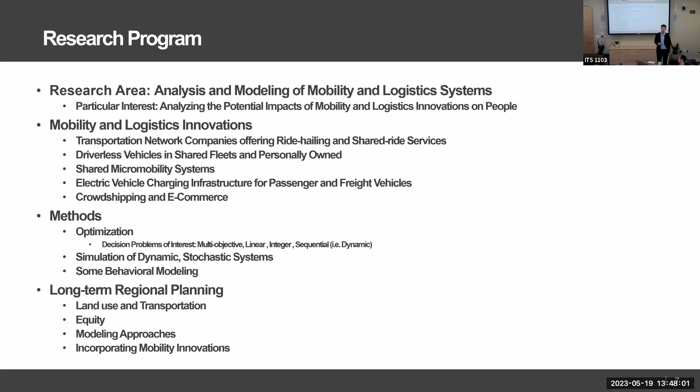I've also become quite interested in long-term regional planning, the models associated with long-term regional planning, the equity implications of long-term regional planning decisions, and really how we can incorporate mobility innovations into those plans and represent those mobility innovations in models that support the planning decisions.

All right, so let's get into the focus of today's talk, which is about operating on-demand microtransit systems with virtual stops. So some acronyms first. I'll be using MOD, or mobility on demand. I'll tend to just say the whole word, but just in case you see it on the slide, here's the acronyms. C to C being corner to corner, as opposed to D to D being door to door, whether or not the vehicle is coming exactly to your trip origin, or you might have to walk a little bit. RV being request vehicle matching, PUDO being pickup and or drop off. These are useful acronyms when describing an Uber and Lyft type service. Ride pooling being RP and RH being ride hailing, and then you might have heard of VMT or VKT. I'll be mostly using vehicle kilometers traveled here today.

All right, so a little bit more about what we'll be talking about. What I mean by mobility on demand is effectively where you, the user, go on your phone application, make a request, and want the vehicle to come immediately. This is opposed to a schedule-based service where you can still go on your app or your web browser and schedule a ride sometime in the future. So I'll mainly be talking about on-demand or immediate requests. Shared ride, that is, you might be inside of a vehicle with strangers who you didn't know before you got into the vehicle.

Virtual stops, this is the idea I kind of mentioned with the corner to corner versus door to door. So rather than just using physical infrastructure-based stops like a bus stop, and then the other end of the possible spectrum being the vehicles come pick you up wherever you want, somewhere in the middle is this idea of virtual stops, right? So bus stops might be a good example if the local regulations allow you to use bus stops, but you might also use other places of interest or places that are convenient for vehicles to pull over to pick up passengers. So yeah, I'll be using C to C or corner to corner also to refer to virtual stops.

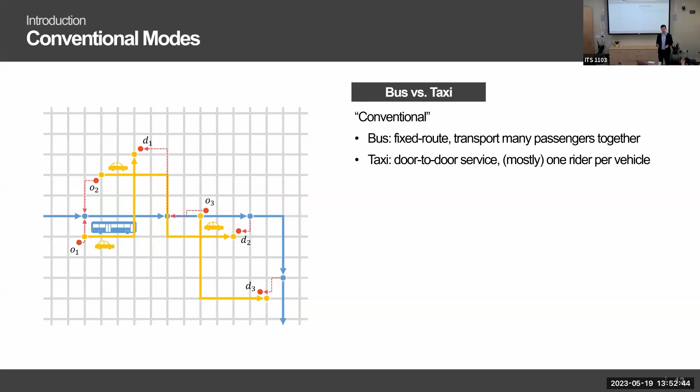Okay, so I have a couple slides here laying out some of the differences between existing modes and a microtransit-based service. So we have on this slide here 3 different travelers, O and D being the traveler's origins and destinations, and in this case, 2 different modes that can serve this set of 3 traveler requests. In the taxi case, you can see we have a lot more yellow lines, which means a lot more vehicle miles traveled, which is negative, of course, but people don't have to walk at all. Whereas with the blue lines, people have to walk to and from the bus stops, more efficient in terms of vehicle miles traveled, but the quality of service might not be that high.

This slide here, we have somewhere in the middle, flexible microtransit-based services, where people still have to walk a little bit, vehicle miles traveled are a little bit larger than a fixed route public transit service. You're kind of meeting in the middle in terms of reducing walk times and reducing vehicle miles.

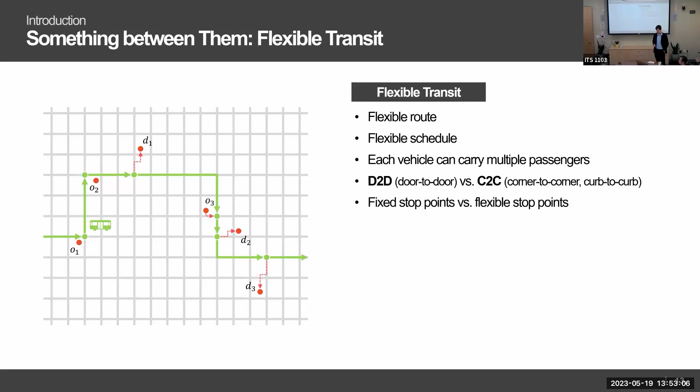And then here's the 4 different service options that I'm going to be comparing throughout the rest of my talk today. Well, I shouldn't say that, actually. We're not going to be comparing fixed route transit. We're going to be comparing walking enabled corner to corner shared ride services, door to door shared ride services, door to door ride hailing, and corner to corner ride hailing, which actually, as a result, will show some benefits on their own. So that is, we're not trying to pack strangers into a vehicle, but we're still having people walk a block or 2 to get access to their UberX or taxi service. Could incorporate corner to corner.

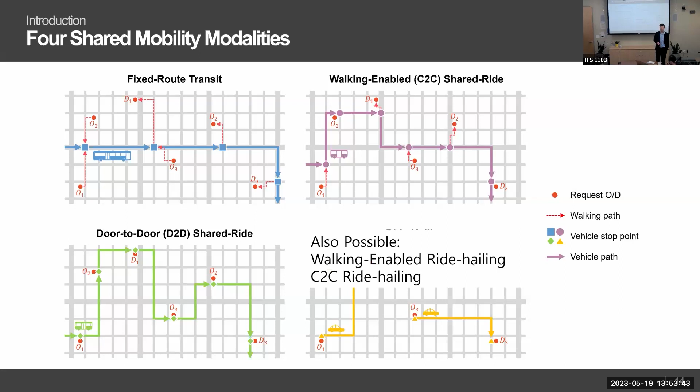All right, so the objectives of this study are as follows: to develop a decision modeling framework, algorithmic strategies, and operational policies in order to make this corner-to-corner shared ride microtransit service actually work well. We want to do that at scale. That is a large number of vehicles, a large number of requests, not just 3 or 4 vehicles that you might see in some of the studies in the literature.

We want the algorithms and the decision models to work in realistic settings, right? In the real world, the network can become congested. The vehicles themselves can actually congest the network. We're going to use simulation models that actually capture those realistic components of a real world transportation network. And then again, speaking back to my prior Pareto frontier in terms of quality of service and capacity throughput of the system, we would like to identify conditions under which the microtransit service works quite well.

We want to do all that algorithmic work, all that optimization, simulation modeling in order to identify the trade-offs between corner-to-corner service, door-to-door service, and walking-enabled service and non-walking enabled services. So these are the 4 services I'll be talking about today.

All right, so what are the challenges that I and my research team face going into this? The first is the size of the decision problem. As I mentioned, you can imagine, right? Every few minutes or every few seconds, I'm a central operator, I have to match my vehicles to people who've made requests on their smartphones. That's kind of the standard for Uber and Lyft. If there's strangers that are in the vehicle as well, which means I might have to deviate from my origin to destination to pick up other travelers, that makes the problem more complicated.

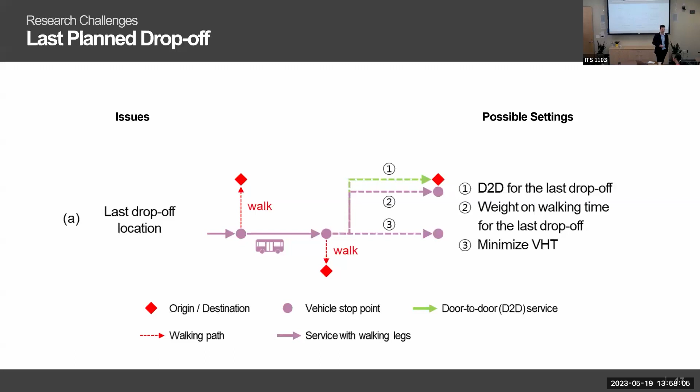I already mentioned the challenge associated with vehicles waiting for travelers at pickup locations. You can obviously mitigate this issue by having the vehicle drive closer to the traveler's original pickup location, as opposed to having the traveler walk a long distance.

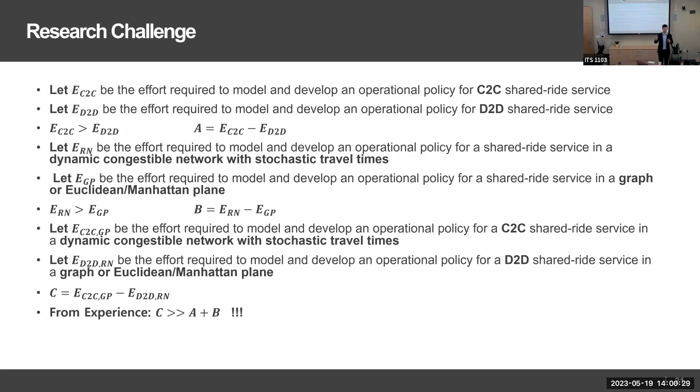All right, so don't read this slide too closely. It's just to say that I'm talking about research challenges here. Going from ride hailing to shared ride services is a much more challenging operational problem. Going from modeling a service without walking legs to walking legs makes the problem more challenging. And doing so in a simulation environment where there's uncertainty makes the problem much, much, much more challenging. These challenges are not additive, they're more multiplicative, basically growing faster than that.

All right, so let's talk about the actual underlying operational problem that we have to deal with here. What information is given to us? Well, we know the status of the vehicle fleet. We know where all of our vehicles are. We know how many vehicles there are. We know the capacity of the vehicle, etc. We have information about traveler requests.

If you think about this problem from an over-the-course-of-a-day perspective, we don't know yet where all these travelers' origins and destinations will be, and we don't know what time of day these requests will pop up into the system. We might have some information prior to the day about what the spatial temporal distribution might be. We're also given that we have a realistic transportation network that suffers from congestion and uncertainty. And we have a long list of parameters that will help us model the problem, which I'm going to show you later.

What we're trying to find is an operational policy, really a decision model, which will tell us what decisions to make given the state of the system at a particular time. We also have to come up with smart algorithms to implement this decision policy, which we'll get into later. With the overall goal being to optimize really multiple objectives. You can think of these objectives from the fleet side and the customer side. They're not super separable, but for now it might be useful to think about it that way.

Service quality being how many of the requests do we actually serve as opposed to reject because we can't get to them in a reasonable amount of time. What's the total time in the system? That is the time from when you make a request to when you walk to your final destination. We can break that down into walk time, wait time, and vehicle travel time.

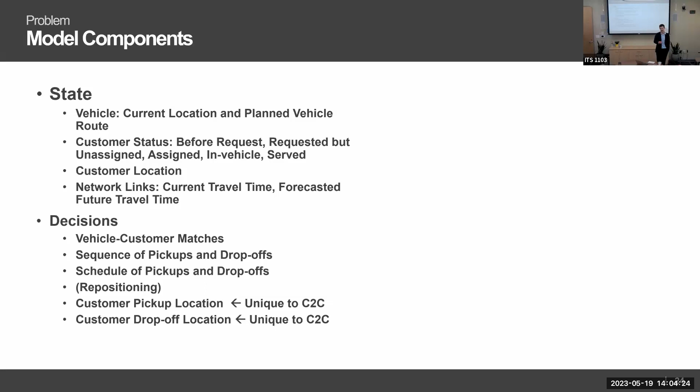We're not going to use repositioning algorithms in this study, but you could easily incorporate that into the decision framework as well. And then finally, we have to choose the customer pickup locations and the customer drop-off locations. Again, this is unique to corner-to-corner service as opposed to door-to-door service. All right, so objectives, again, from another perspective: minimizing customer wait time, minimizing fleet miles, and maximizing the number of customers served.

Sources of uncertainty. The main source of uncertainty in the system is we don't know when future requests are going to happen, and we don't know where they're going to happen. We might know a distribution from history or from our prediction model. We don't know exactly where these things are going to occur. There's also uncertainty about congestion in the network. And there are other sources of uncertainty, which our model doesn't incorporate, but I hope we can discuss later, which is an area of research of mine right now.

Okay, so that's the problem and how you might model it. Let's talk now about what our operational policy is. All right, so top left here. Basically, every 30 seconds, we're going to call this module in our software. And there's going to be 4 effective stages of the decision process. The first thing is filtering in a set of potential vehicles and requests that can be matched to each other, right? In theory, every vehicle in the system can be matched to every possible new request in the system. But we don't want to make that assumption because vehicles could be very far away from requests. Vehicles could already be at capacity. Let's not consider them in our matching algorithm.

The second is another type of check, as to whether or not a particular vehicle can actually meet the time window constraints associated with the request. So we're going to have some guarantees on our quality of service. You've got to be picked up within no more than 20 minutes. Your detour time is not going to be more than 15 minutes. Your detour time is not going to be greater than 50% of your base distance. These types of factors we're going to incorporate into our filtering approach.

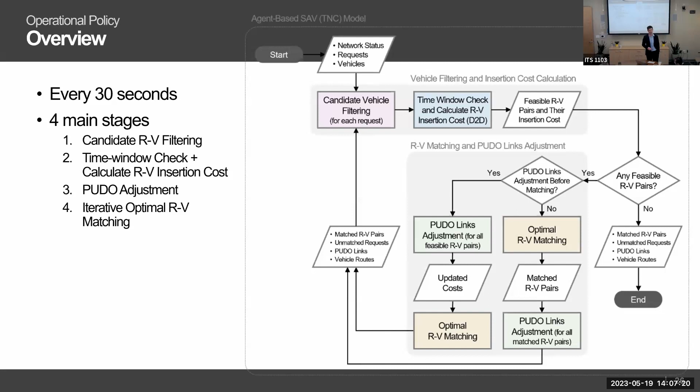Is the vehicle idle? If it is, it's in our candidate vehicle set. If it's not idle, that is, there's passengers already in the vehicle, does that vehicle actually have an empty seat inside of it? If there's no empty seats, we can't match our request to it. Is the vehicle moving in a similar direction to our request? I'll show you more details on that on the next slide. If they're moving in similar directions, they can be matched. If they're moving in opposite directions, they cannot be matched.

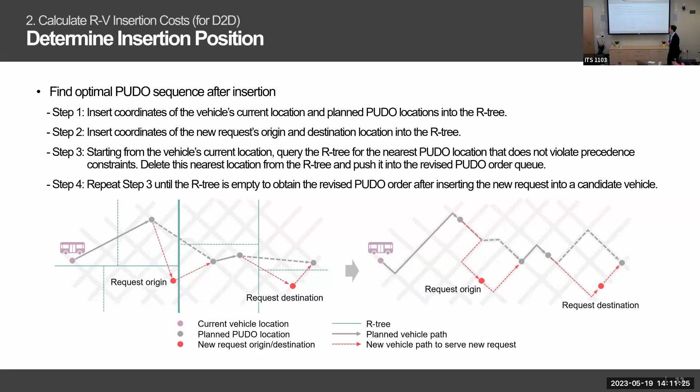All right, time window checks are relatively straightforward. We, that is the modelers, and in the real world, what we're representing is this service provider offers some guarantees in quality of service. If a vehicle cannot pick up the traveler within a reasonable amount of time, there's no possible match between these two. And similarly, if that vehicle cannot take that request to their destination within a reasonable amount of time, that request and that vehicle cannot be matched.

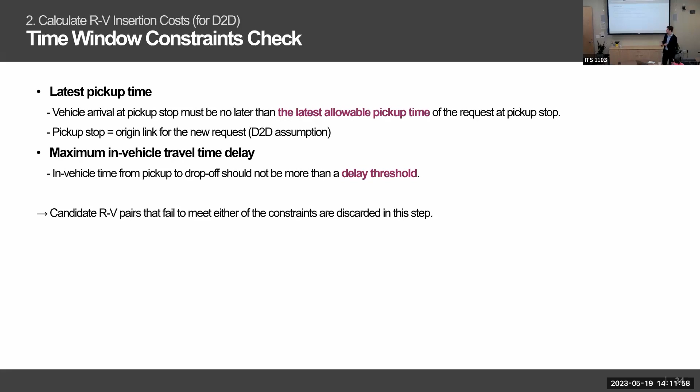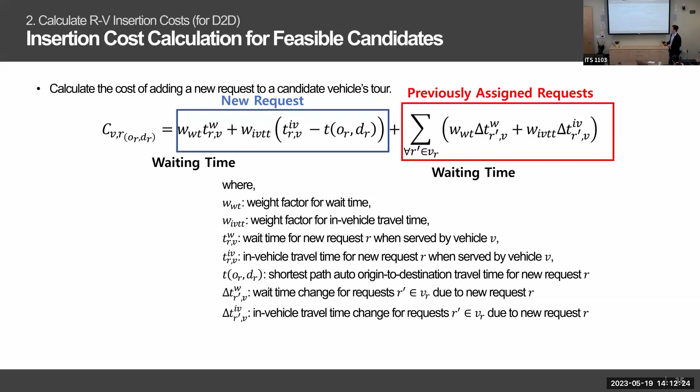Okay, because we're going to be solving an optimization problem, a matching problem between the requests and vehicles that made it through this filtering process, we need to calculate what the cost of a match would be. Okay, so here's the function right here. I'm going to walk you through it. The left-hand side is for the new request, the person that has not been assigned to a vehicle yet. There's two terms. The first is the expected waiting time for assigning this vehicle to this particular request, and the detour time.

So if the person took their personal vehicle directly from their origin to their destination, we know what that travel time would be. How much extra time is associated with using this microtransit service? We want to have a cost associated with both our new request waiting time and their detour time. You can easily change what the weights are on these, calibrated based on some behavioral data. I think we end up just using one for these weights here.

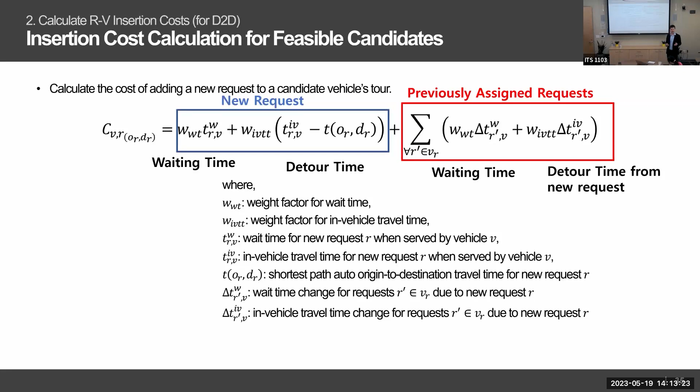And then we do the same exact thing for the requests that have already been assigned to that particular vehicle. If they haven't been picked up yet, that means that this new match might actually increase the time in which they're going to get picked up. It's more likely that the requests are already inside of the vehicle, and how much added detour is associated with picking up this new request. So these are all the costs that are incorporated into the cost function for a particular request-vehicle pair.

We don't need to go into the details here, but it's kind of a complicated process for determining what are the potential feasible locations where travelers can walk to. Again, we want to have passengers or requests walking to locations that are moving in the same direction as the vehicles. This is particularly the case if you have one-way streets. You never want the vehicle having to reverse its direction and moving in the wrong way.

We actually tested a number of different policies. So we set a walking range of, well, we're going to vary it later, 400 meters, 800 meters, 1200 meters, etc. Do you want to choose the locations that are as close to the traveler request as possible, or as a baseline, want to make the travelers walk as far as possible? Or do you just want to use a random-based approach? Maybe that'll work best in the end. The answer, of course, is it depends.

In general, you do want to have your travelers walking to your main corridors, your arterial roads. In this case, we do assume that there's not many issues in terms of picking up travelers on busy corridors. Of course, don't let the vehicles pick up the travelers on the highways, but they can pick them up on the heavy arterials.

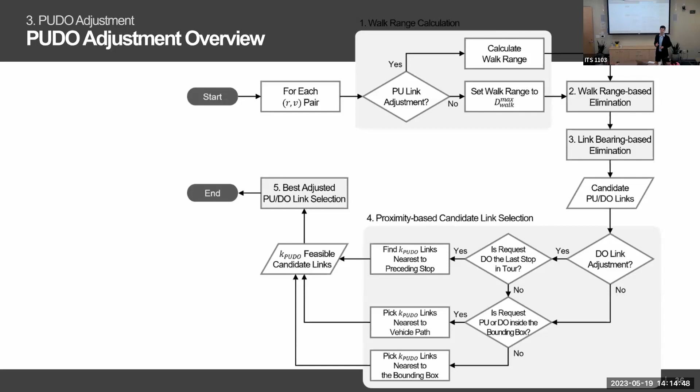All right, this is the bipartite matching function, which is kind of the standard approach for matching vehicles to requests in these vehicle fleet operational problems. We actually do something that I think is quite creative. So the bipartite matching has effectively one flaw, which is that at every decision period, you can only assign one new request to a vehicle. That gives it its nice analytical properties, which will allow you to solve matching problems for thousands of vehicles and thousands of requests.

If you were to allow a single vehicle at any time step to be matched to more than one traveler, you move into the realm of a kind of standard vehicle routing problem, and the problem becomes much more challenging computationally to solve. We kind of cheat the system. At any particular time step, we solve the matching problem once, but we have this inherent quality of service built into there, which is this p-value, which is the reward for an assignment. And if the reward is not greater than the cost, the vehicle and the request will not be matched.

So if you do have a vehicle that's the only one located near a large number of requests, and there are no other vehicles nearby, in the first iteration, I'll be matched to you because you're the closest. I will then solve the matching problem again for the remaining requests that haven't been matched yet. Because there was no other vehicle nearby, now we'll pick up you as well.

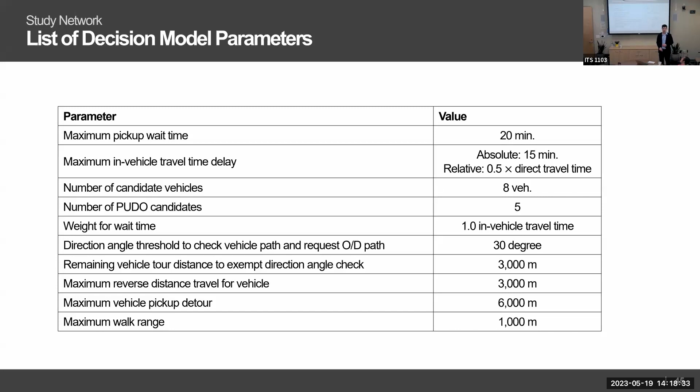Maximum angle associated with the direction of the vehicle and the request is 30 degrees, 3,000 meter or 3 kilometer remaining vehicle tour to exempt direction angle. Didn't get into that too much. Same idea for how far backwards you can go. Maximum vehicle pickup detour, we have a distance and a time base, and the maximum walk range here, which we're going to vary significantly, is 1 kilometer.

Some of the parameters associated with the simulation: we're going to run it for 24 hours. We're going to take 30 seconds between each set of matching, sequencing, scheduling, and repositioning decisions. The number of requests is very large, 220,000 over the course of the day. We're going to assume that each request is just one traveler. We could and should generalize this such that our vehicles become full sooner, but for now, we're just assuming it's one traveler per request. And then for the initial locations of the vehicles, we're assuming that the density of vehicles is inversely proportional to the area of a particular TAZ.

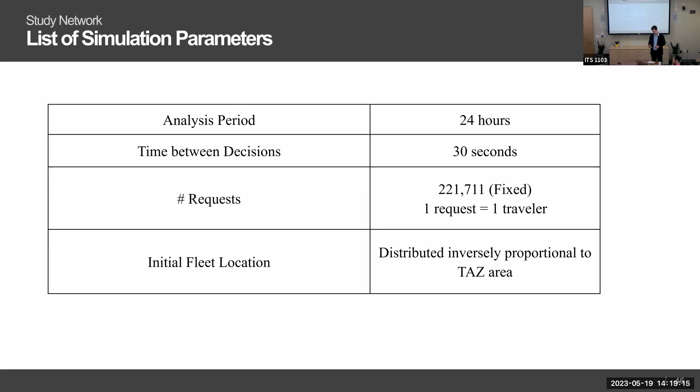So the performance metrics we're going to use to compare these 4 different services and evaluate the quality of our algorithms are the matching rate, vehicle kilometers traveled, vehicle occupancy, customer wait time, or customer total time, which we're going to break down into the following components.

All right. So we're going to do a bunch of scenario analysis. The first of those scenario analyses is going to be the walk range. What is the maximum distance we're going to allow passengers to walk? We're going to do all of these analyses by varying the fleet size. It is the critical design factor when operating microtransit services.

We're also going to vary the walk speed. Why are we doing that? Well, we're going to assess how much more efficient the service is if you actually have micromobility everywhere. You know, e-scooters, you can easily fold them up and take them into your microtransit vehicle. Kind of an interesting study. And then we're going to vary implicitly the seat capacity of each vehicle.

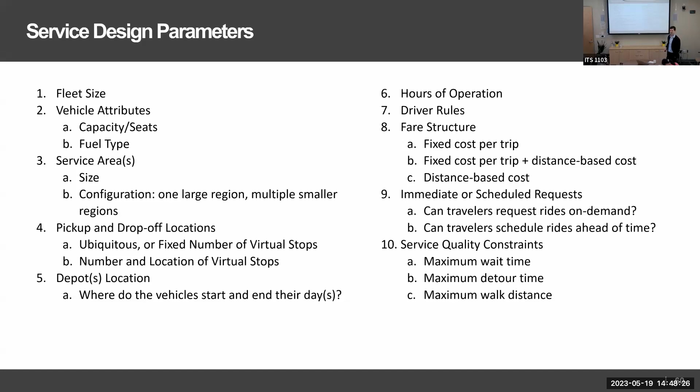I have a second question, but go ahead. I think you haven't got one. I've been biased towards the front. Inequities here. Go ahead. I have two questions. First one, can we go back to the slides with the filter criteria, please? Thank you. If you have more, please let me know. Oh, sorry. Yeah.

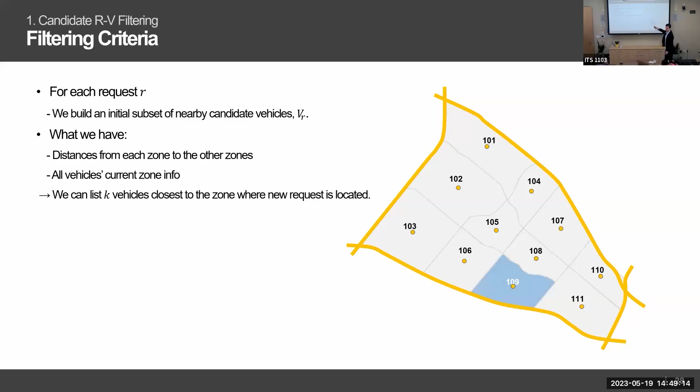Going with the flow chart at the bottom? Yes. And the vehicle candidates there. So I'm curious, in this framework, we only consider the vehicles that already have passengers, right? Then if the vehicle is empty, it becomes a candidate automatically. Is that what the second condition is telling us? Yes and no. This one right here, right? So the answer to your question is yes and no. At this step in the algorithm, if it's idle, it's in. But if you go back to the prior slide, we had to make sure that it was within this larger candidate set. It can't be too far away.

Yes, so then my question is, in the analysis, as the number of vehicles increases, does the framework tell us what proportion of vehicles are actually empty at a certain time stamp? As the number of vehicles increases, there's only a certain amount of population there. Then if there are more vehicles, there would be a proportion of vehicles running without passengers at a certain time.

I'll try to answer what I think your question is, but you can ask again. So we allow for a fixed number of idle vehicles independent of the spatial location of the request or the relative number of requests and vehicles. It's possible that there are currently zero idle vehicles in our simulation, in which case we can't add them to our candidate sets. That didn't answer your question, maybe you can ask again.

Yes, but just refer to the graphs at the end of the findings, where the matching rate increases as the number of vehicles increases. But that also means there's a proportion of vehicles that probably don't have passengers. Oh, in the results, yes, towards the right end. Yeah, certainly as you have more vehicles, the average utilization of the vehicles is decreasing. Do we know roughly the number or proportion of that? Because that also impacts efficiency at the system level, for operations and travelers.

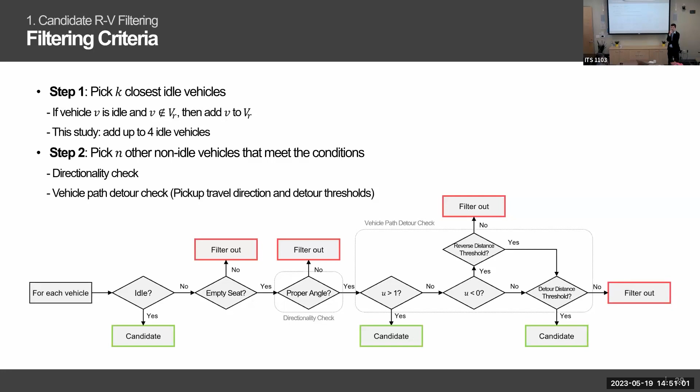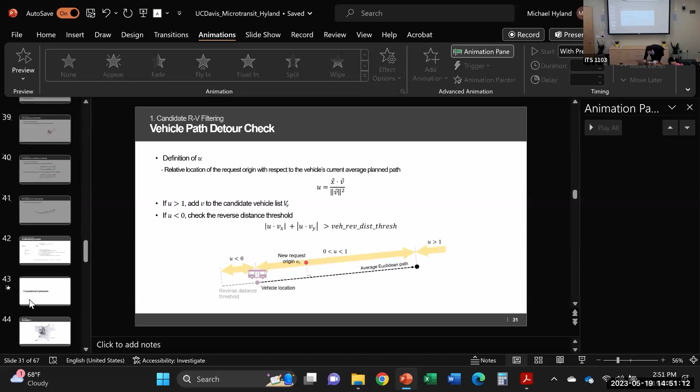Yeah, I hope my results implicitly show that you don't need all the vehicles on the right end of that graph. So I would hope that a decision maker would use this graph to identify that you're in the range of 4,000 to 6,000, where you want to be. Not 10,000.

Okay. So my second question is, you talk about ride hailing and micromobility, like e-bikes or bike sharing, so basically there's a connection between the shared mobility modes. But have you considered in the research that, for locality, those two are very different, ride hailing and e-bikes or bike sharing systems, because one requires infrastructure like multi-lane arterials, and the other perhaps requires new infrastructure?

And I think that's a really big challenge for them to consider. If we don't have infrastructure, there's no way to jump into the service. I agree, I agree. Yeah, no, certainly. We didn't look at infrastructure at all. We assumed this. Yeah, in Irvine you can ride these things on sidewalks, but that's probably not the case in many other places. Well, let me let you behind the scenes a little bit.

We assumed faster walking speeds during our testing scenarios because weird things were happening and we were getting worse performance for the corner to corner than we were door to door. We're like, something weird is going on here. Let's just make the walking speeds really fast. And if the walking speeds are really fast and we get better performance metrics, that means we need to do a better job of picking up and drop off locations. So that was the case.

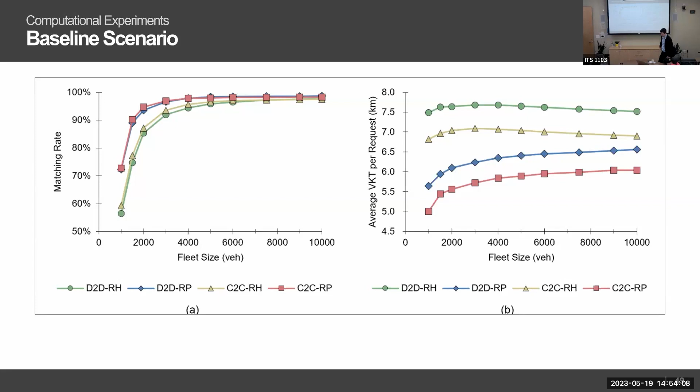Mike, I have a very specific question. I'm trying to understand, it seems like you had some filtering that is based on simulation. How does that filtering build into the analytical model? Is it just contributing to the definition of the feasible set for your choice? I didn't see the connection. I think there's not. It's just two separate steps. Because it's hard for me to imagine how the filtering helps or is part of the analytical model. What are you referring to? Yeah, you had some minimizing.

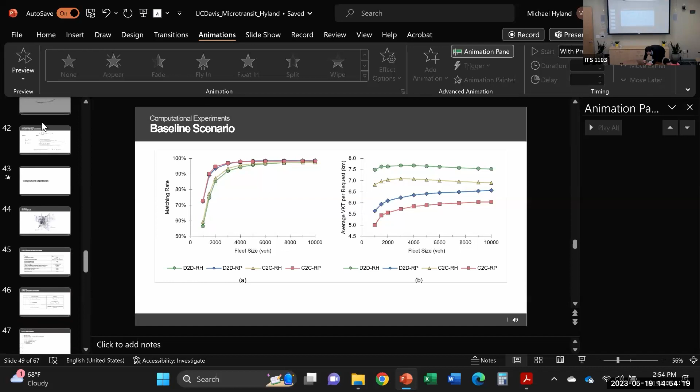Right, so I was trying to understand where the filtering goes. Is that maybe the set here, VR? Okay, so the choice set is actually based on the filtered locations. Exactly. So all that effort was to make sure that, my original work was like 1,000 by 1,000. Instead, we're doing 1,000 by 8. Yeah, I feel your pain. Even multiple vehicle routing problems are notoriously difficult.

Did you talk to people who might be using microtransit? Do they prefer dynamic virtual locations or fixed virtual locations? I'm just imagining myself. I don't want to keep changing location. Oh, you mean like human users? Human, like us. Yeah, no, that was the wrong example. I thought you meant like people that own and operate microtransit. No, I mean end users. Well, yeah. Having offline, fixed virtual locations would make your problem much easier.

Yeah, so the one study I'm aware of was actually a case at MIT, Sébastien Martin, he's at Northwestern now. They actually implemented the test in Lyft, right? I think this was for corner to corner ride hailing. They didn't have ride pooling, but they found that having this offline pseudo selection only decreased operational efficiency slightly, but it increased customer retention to a much greater degree, such that it increased their profits in their analysis because of the simplicity.